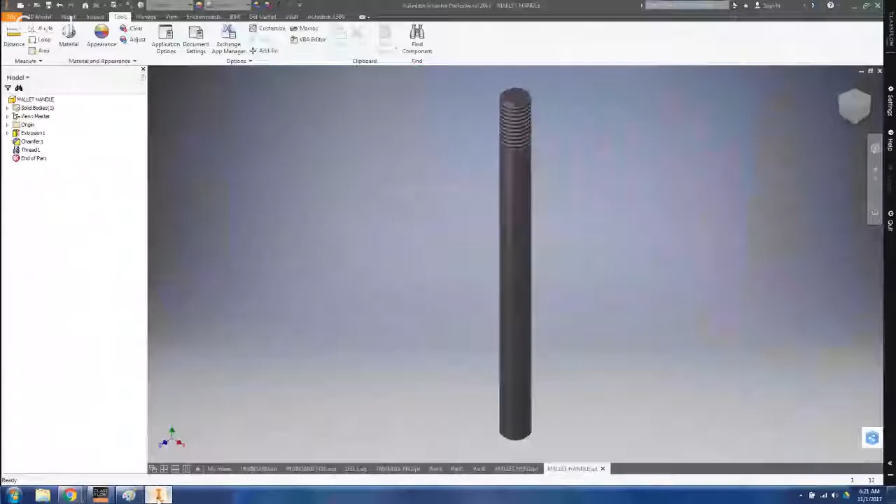Guys, in this video we're going to make an assembly of the mallet handle. We're going to make a new assembly file, and I'll show you this way to do it. So if you do an assembly from this window, you want to make sure you select just a standard assembly as opposed to a weldment assembly, and you'll create that.

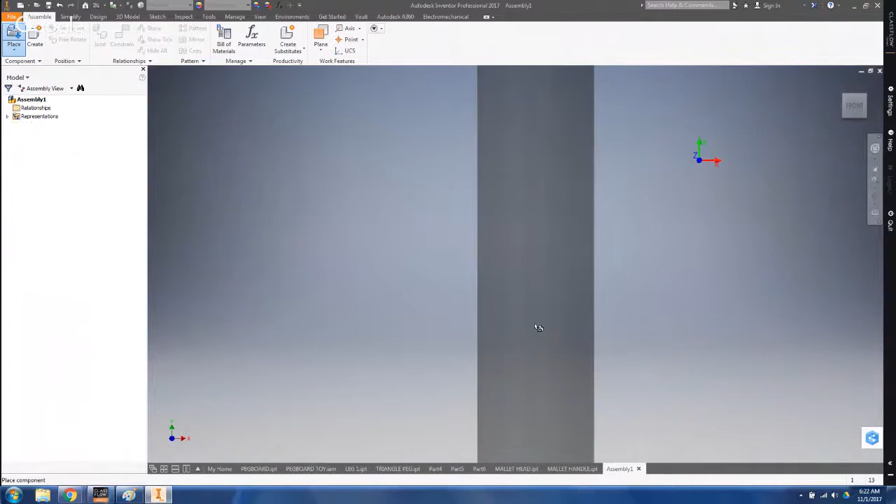Our parts. So I'm going to place, let's see if I can place both at the same time. So I'm just holding down shift and selecting both, and seeing if I can put both in at the same time. Sure, looks like I was able to do that. That's cool. So that kind of speeds that up.

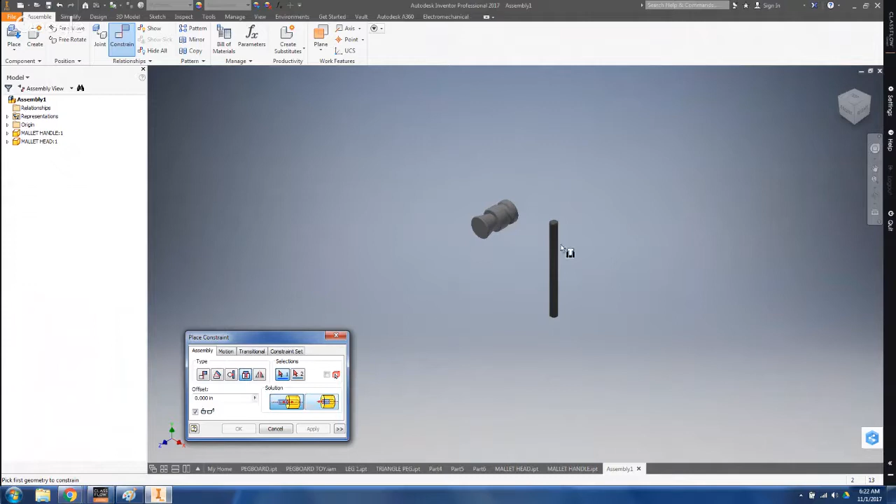All right, so I need to get the mallet handle inside the mallet head, and so I'm going to do that through a constraint. And I'm going to change it here. Instead of doing a type mate constraint or flush, I'm going to do an insert constraint. Insert the threaded end of my mallet handle into the mallet head hole.

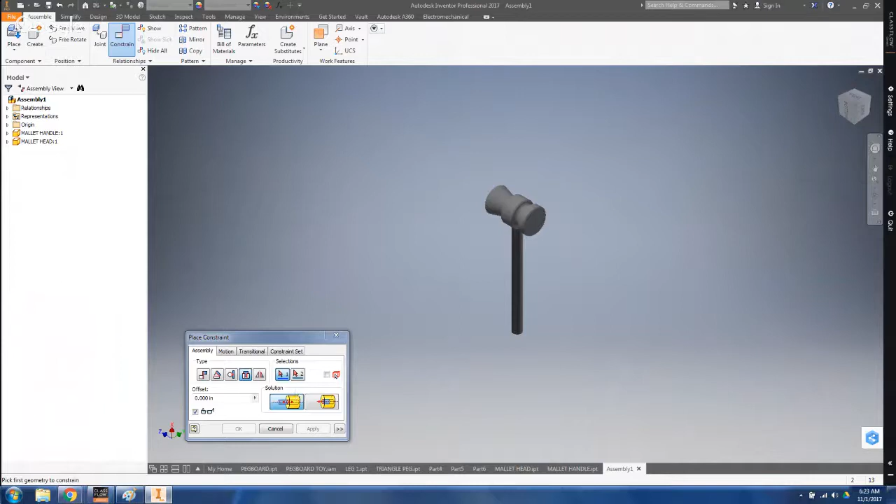I can find that hole. There it is. And apply. And there we have it. We have our mallet ready to use on our pegboard toy. So I'll save this, and we'll call this just the mallet.

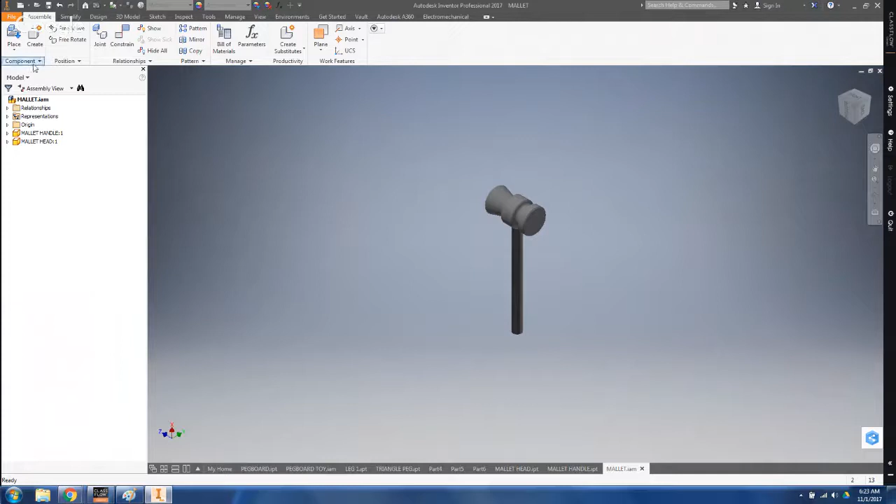The mallet I'm going to just put into my pegboard toy assembly. Let me make those separate. So what I'm going to make is an assembly within an assembly. It's called nesting an assembly. I'm going to make a new assembly. And I'm going to place now my mallet assembly,

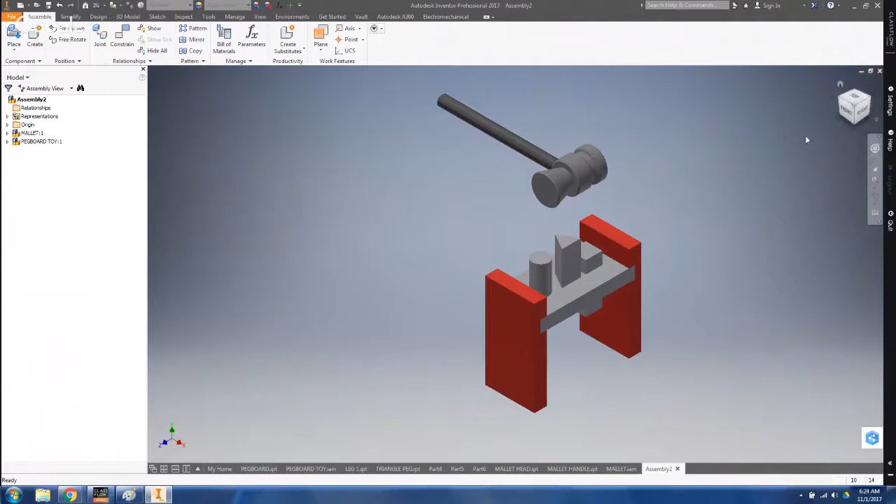my pegboard toy assembly. So I'm going to click on my mallet here, and then hold down shift and click on my pegboard toy too. And click. And voila, I have my setup here. I have my pegboard, I have my mallet, and done with the building of this. If I wanted to, I could color some more of the parts.

You'll notice when you nest assemblies within assemblies, I am no longer able to move the parts of the pegboard toy, so move up and down like before. So just kind of be aware of that. You have to be happy with where that is when you make an assembly with an assembly. I could have just as easily put my mallet inside of the assembly of my pegboard toy.

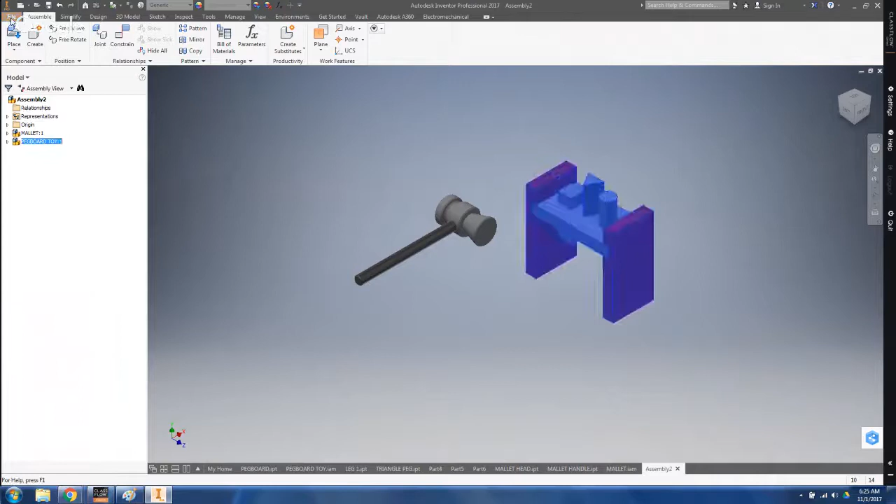Save this, and I'll save it final pegboard toy assembly. Save it. Okay. Up to this point, this is great. You should be getting pretty decent at modeling. And next up, we'll talk about how we can make orthographic and isometric drawings using Autodesk Inventor.